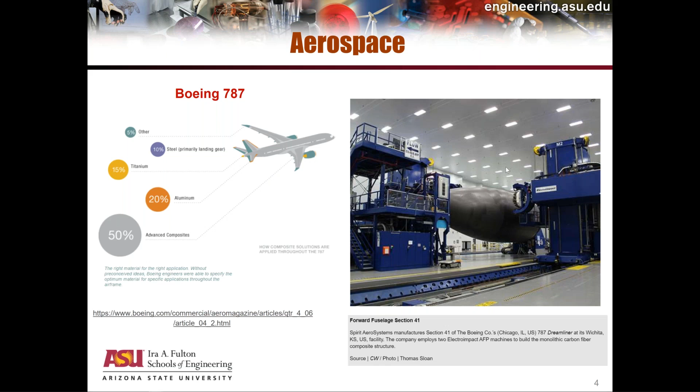So I'll put that on the side, and then I'm going to discuss a little bit about my history getting involved with research in the area of impact mitigation. Back in 2001, I was introduced by one of my former PhD students who was working for Honeywell Engines in the Phoenix area to the members of the FAA team that was taking care of the engine containment issue.

For those of you who are old enough to know, back in 1989, there was a United Airlines flight going to San Francisco. There was a fan blade out event that took place at 37,000 feet. Fortunately, we had the pilot able to control the aircraft reasonably well so that there was a landing that took place in Sioux City Airport. Unfortunately, 111 people out of the 296 died.

Since then, FAA has required all engine manufacturers to make sure that if there is an unexpected fan blade out event, the pieces are contained within the containment system and they don't sever the other systems in the aircraft, like the hydraulic and the electrical networks that are required for other performances.

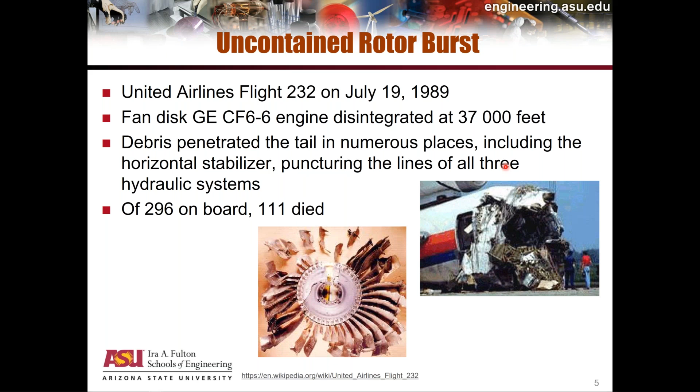Big engine aircraft manufacturers like General Electric, Rolls-Royce, Honeywell engines, and Pratt & Whitney have made sure that the latest generation of aircraft engines are equipped with the appropriate containment system, and they have helped a lot. If you look at the recent fan blade or disc failures that have taken place in the last 5-6 years, you'll find there are a few of them, and I've listed a few on the screen, and you can see images of some of the aircraft after they have landed on the ground.

So we have gone a long way from losing control of an aircraft in highly unpredictable ways because there was no containment system to take care of an unexpected event like this, to having more control over unexpected events like fan blade and disc failures and being able to maneuver the aircraft back on the ground.

So I got started doing research work in this area with sponsorship from FAA. They gave us money to start building a constitutive model that would go into a finite element program, and we started working on a finite element program called LS-DYNA, which is a commercial program started by John Hallquist after he left the Lawrence Livermore lab.

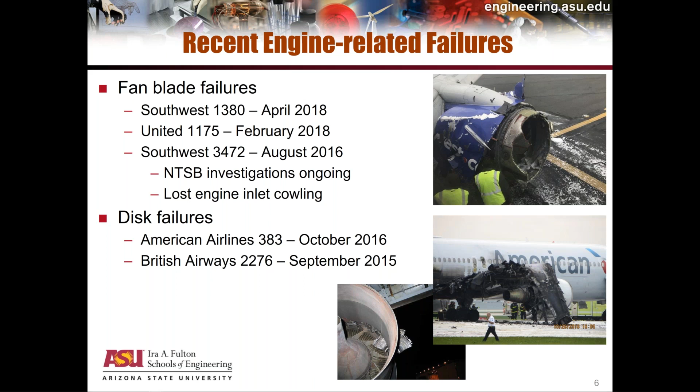So with that background that I started working on back in 2001, I started looking at other areas. By training, I'm a civil engineer, so my undergraduate degree is in civil engineering. My master's and PhD degrees are in materials engineering tied to solid mechanics. So I started looking for other areas where I could use this knowledge and come up with new product designs.

So if you want to do ballistic mitigation, there will be competing things that come into play. You want your product to be as light as possible. You want your product to be as thin as possible. You want it to be really cheap. And in the case of body armor, not only do you want it to be as concealable as possible, but you also would like to have the user have that wear comfort, so that when a police officer is wearing the body armor, he or she can fulfill their obligations without being borne down, without being weighted down by the body armor.

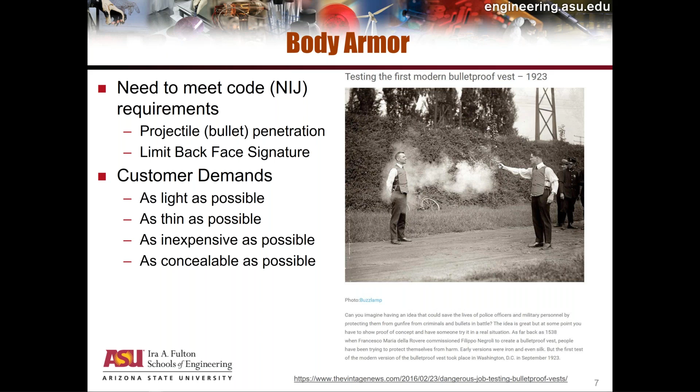So weight, whether you're designing aircrafts or helicopters, or you're designing body armor, or you're designing football helmets, is the one item on top of the list. To give you an idea, when you look at the armor that a typical US soldier wears, the total weight of all the stuff that the soldier has to wear is roughly between 100 and 150 pounds. And the two biggest culprits that add to the weight are batteries, because a lot of electronic gear is currently being used by the soldiers.

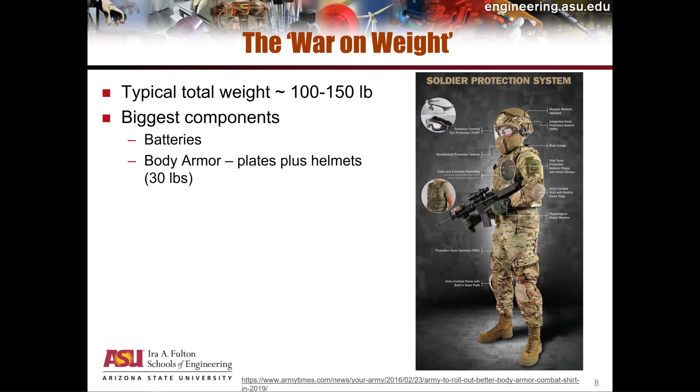And the second one is body armor. Typically, the plates and the helmets weigh about 30 pounds. So if you can shave 2, 3, 4 pounds, that is an enormous savings in the weight in terms of what the soldier would have to carry going long distances. And that savings in weight may translate into other functionalities that typically is not available because of the weight the soldier has to carry on the field.

So this is a very nice segue into how this idea also applies in the case of sports equipment. And I'm going to use the example of American football to illustrate that the impact you see with fan blade out events or with body armor is also borne out in sports equipment.

People have been ignoring this for a very long time, but this problem cannot be ignored anymore. There's a lot of news showing how poorly ex-NFL players are doing, especially the ones subjected to a lot of MTBI or TBI. These are traumatic brain injuries that take place when football helmets impact each other and the head is subjected to uncontrollable forces.

So between 1869 and 1905, there were 18 deaths and 150 serious brain injuries. But lately, when you look at previous data, they didn't have CAT scan data available, but now CAT scan data is available, so you can clearly see the trauma these football players have gone through.

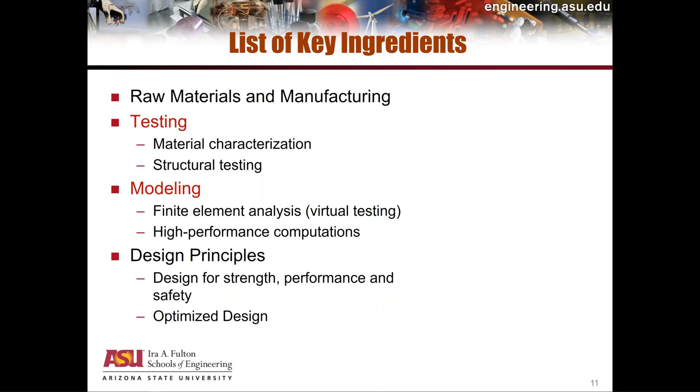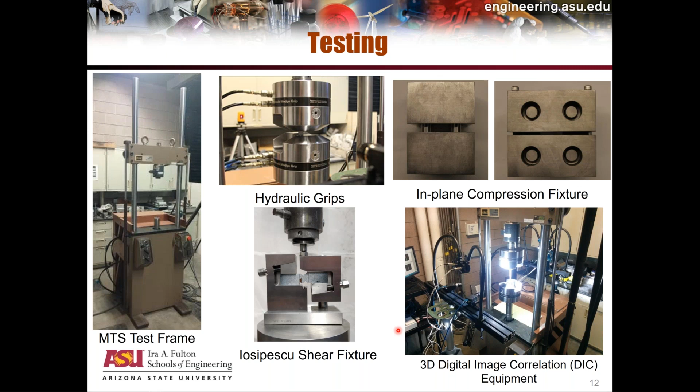In addition, we have high-speed cameras that we use to capture events where the duration could be just a few milliseconds. We have used this to test Kevlar, which I'm going to discuss a little bit as part of the engine containment system. So we take a piece of Kevlar, put it in a hydraulic system, pull it at a very high rate, use this camera, get the strain field, and then do the data analysis.

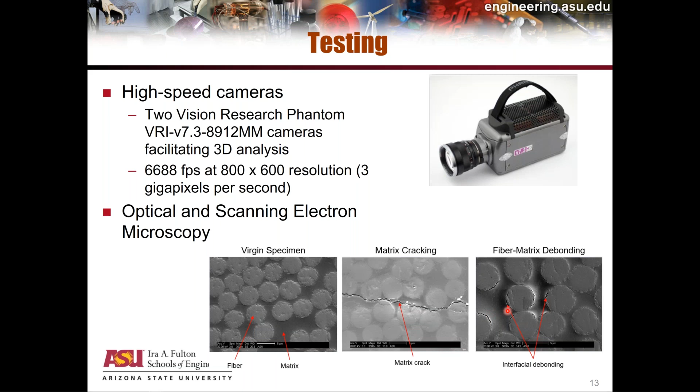And finally, we also have access to excellent optical and scanning electron microscopy that we use to find out exactly what's inside the material before it is tested, which I'm calling here the virgin specimen, and after it is tested, to show the different types of damage and failure that can take place inside the material. So here you can see matrix cracking, and here you can see debonding between the fiber and the matrix.

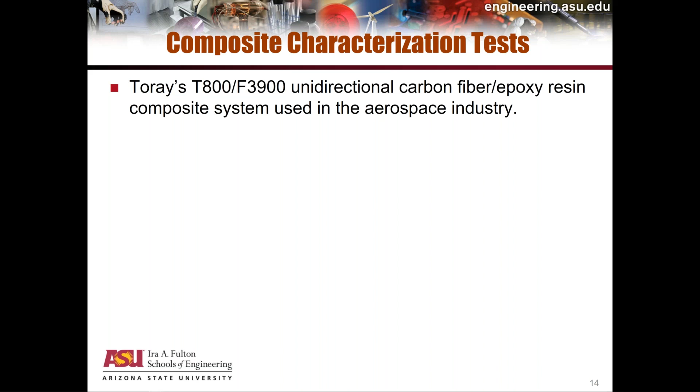So one material that we have analyzed and tested a lot, that is used quite ubiquitously in the aerospace industry, is a unidirectional composite manufactured by Toray Composites called T800/F3900. This is a composite which has a carbon fiber and a proprietary epoxy system.

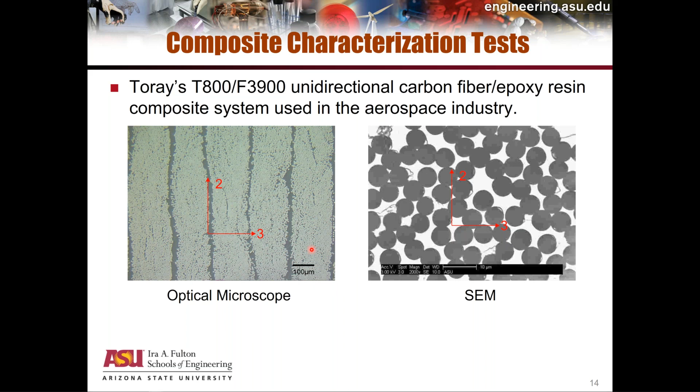You can see here we make a lot of assumptions when we do the analysis, when we build the model, but in reality these assumptions are not actually borne out when we examine these materials very closely in high magnified zones. So these are the material properties that we have found. Some of them are from the manufacturer, others are from testing in the laboratory.

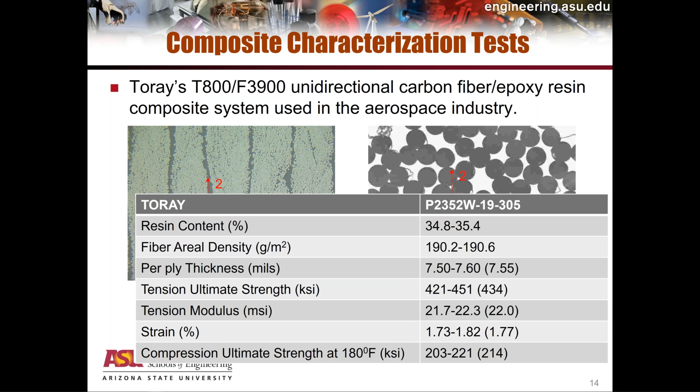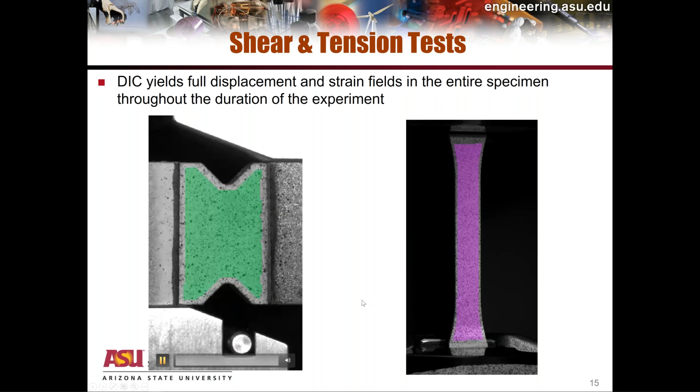I'm going to quickly walk through and show you some of the testing that we do to get material properties. On the left is the Iosipescu shear test being done, and on the right is a tensile test being done in the direction where the fibers are. All the colors you see are different strains being measured by the DIC software.

On the left, the shear test is stopped when we run out of room in the test equipment to carry the test further. On the right, we get a very nice crack in the gauge section in the center of the specimen. So we have reasonably good, reliable data available to us to build our constitutive models.

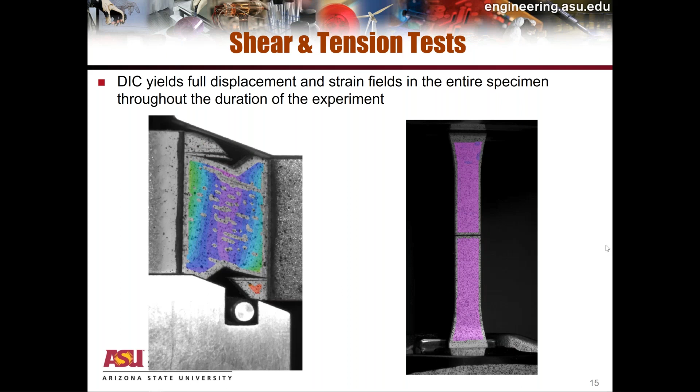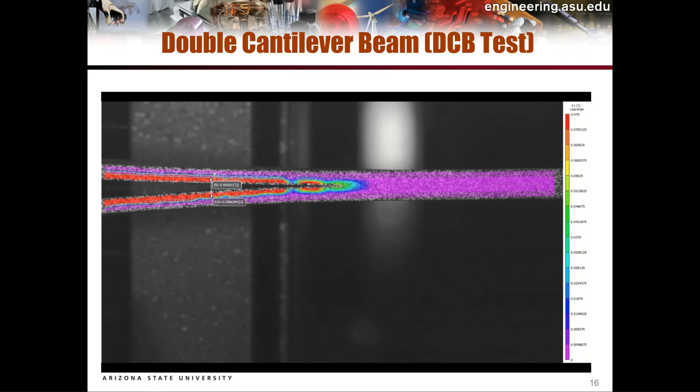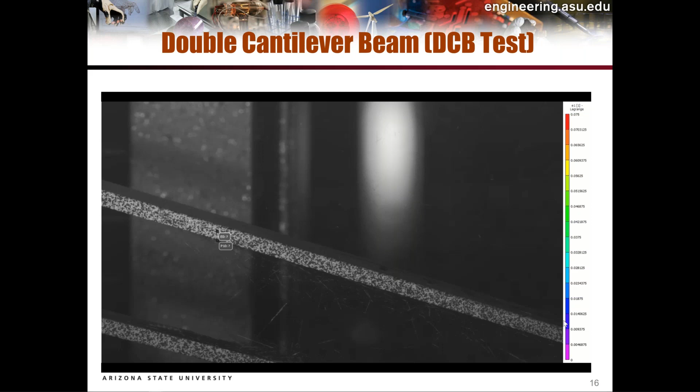So this is another example of how you would characterize a laminated composite. This is a double cantilever test being done to find out what the properties are between two layers of the composite, the two lamina, so to speak. Then the test results, the DCB and the end notch flexure test results, give us additional pieces of information to put into our computer model.

Now, these computer models, fortunately or unfortunately, are extremely expensive to run, so we have a high performance computing center where we run our computer models. There are 4 case studies. I'll quickly go through the first one, which deals with the engine containment system.

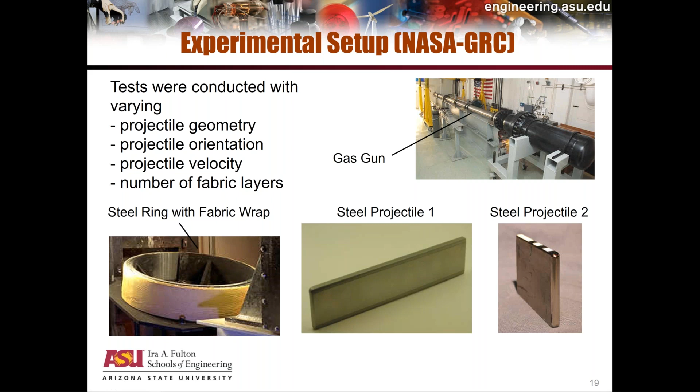Most of the testing, high velocity impact testing, was done at NASA Glenn Research Center. You can see the gas gun on the top right. We have a 40-inch diameter steel ring wrapped with layers and layers of Kevlar. There is a cutout here where these 2 projectiles are going to hit, against the Kevlar layers. The objective of this exercise is to see how good the computer model is in predicting this impact event.

So this is the computer model here. We have the steel ring shown in gray, and the Kevlar shown in gold. The LS-DYNA material model that we developed for this, for dry fabrics, is called MAT 214. These are the 2 models of the projectiles that I showed you in the previous slide. Then we take it and run it.

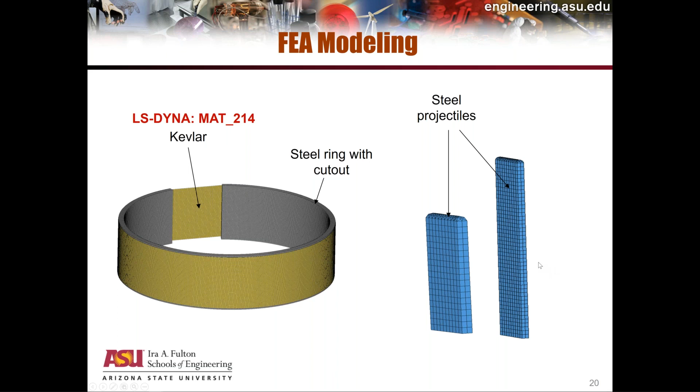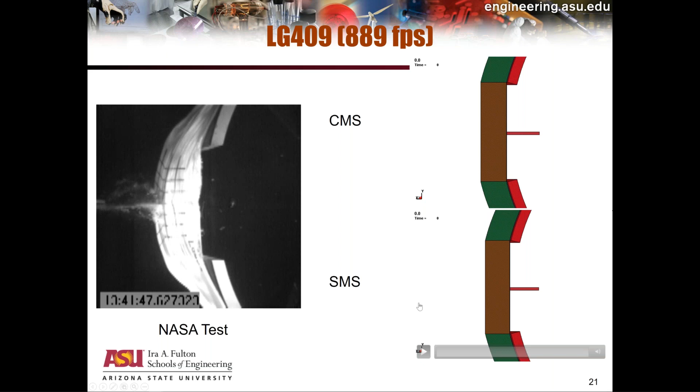On the left are high-speed camera images from NASA Glenn Research Center that show that with this configuration, the projectile is uncontained. On the right are our computer predictions. There are 2 computer models here, and both do a reasonably good job predicting exactly what the exit velocity of the projectile is, which is the gold standard in measuring how good the computer model is. You can see here the projectile velocity is roughly 889 feet per second.

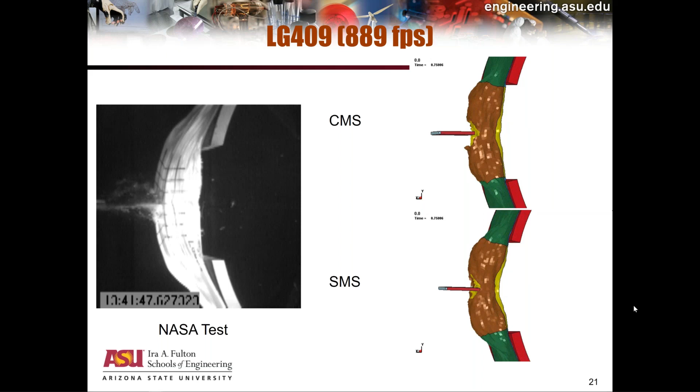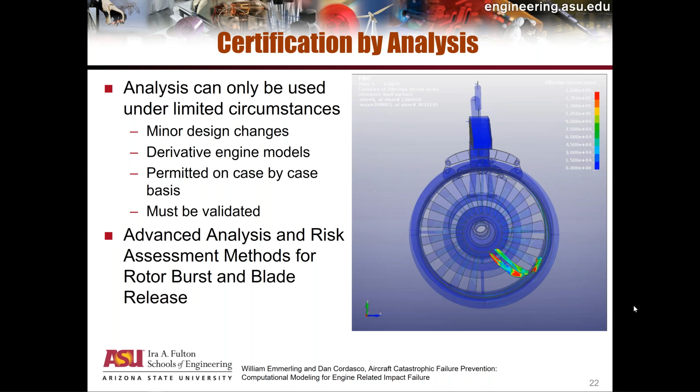Now, the reason I had the title in terms of saying design by analysis is because FAA allows certification by analysis, provided you can show that your analysis models have reasonably good predictive levels, so you can cut down on the testing. Anecdotally, I've been told by people at Honeywell Engines that doing full-scale testing of one of their engines runs anywhere between $5 million to $10 million, and they would obviously like to minimize the number of full-scale tests that they do.

Obviously, if you have a good predictive computer model, the cost is extremely minor compared to carrying out full-scale testing. So the second test case I'm going to look at is a much more involved project.

We have been working on this since 2013. This is what I'd like to refer to as the mother of all composite models for impact analysis. This material model, implemented in LS-DYNA, has been developed with funding from FAA and NASA as part of the Advanced Composites project.

It started in 2013 with funding from NASA. From 2015 to 2018, we received funding with FAA, plus additional money from NASA. Since 2018, FAA has continued to work with us and provided funding.

The other entities involved were George Mason University and Ohio State University. Ohio State University has excellent testing facilities to do rate-dependent testing, and George Mason University collaborated with us to implement the theory behind MAT 213 in the LS-DYNA program.

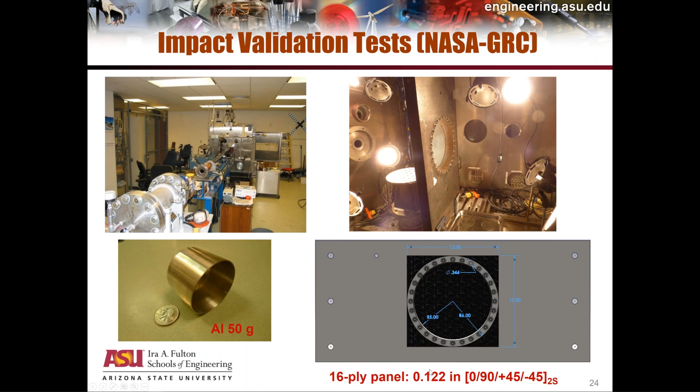That is then used by the high-speed cameras. Information is gathered, and then DIC is used to find the full field displacement, which is used to construct the strain field. They did a total of 14 tests, out of which 11 were contained and 3 were uncontained.

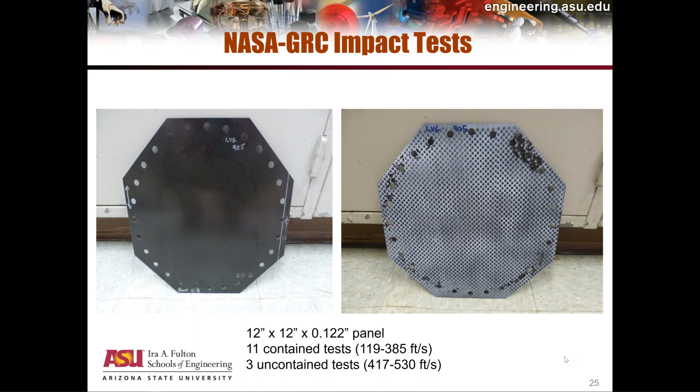I'm going to show you an example of two contained tests—one where the damage is not visible to the naked eye, and the other where the damage is visible—and show you how MAT213, or the LS-DYNA program, has been used as a predictive tool.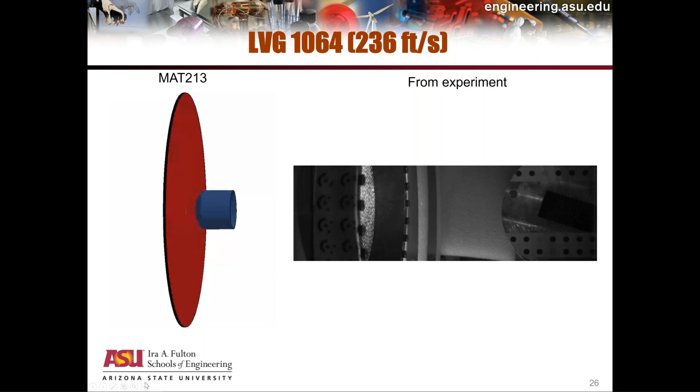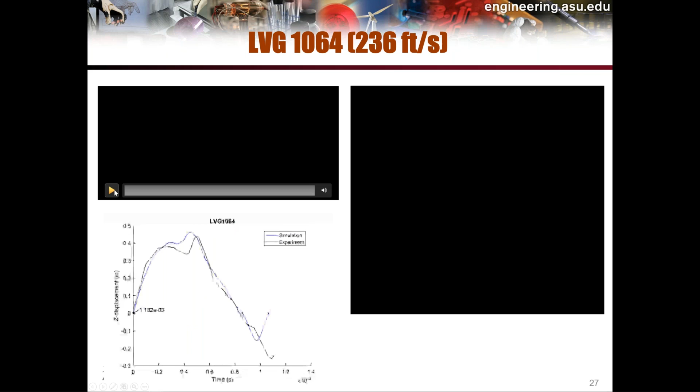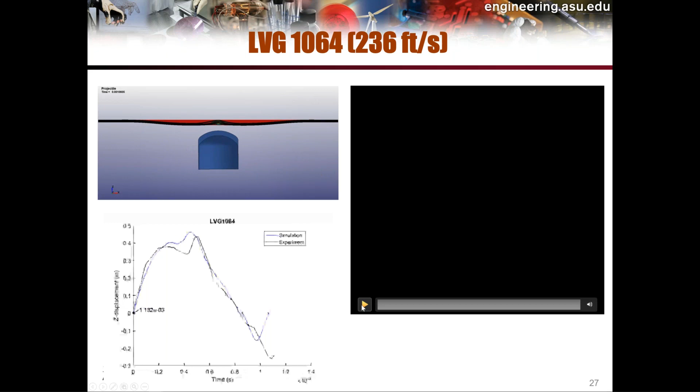We have the same thing available in terms of the computer simulation. Here I'm showing different snapshots—this is the projectile hitting the plate, looking bottom up. On the right is the rear side of the panel where we can see the Z displacement. Here we are comparing the computer prediction against the experimental data.

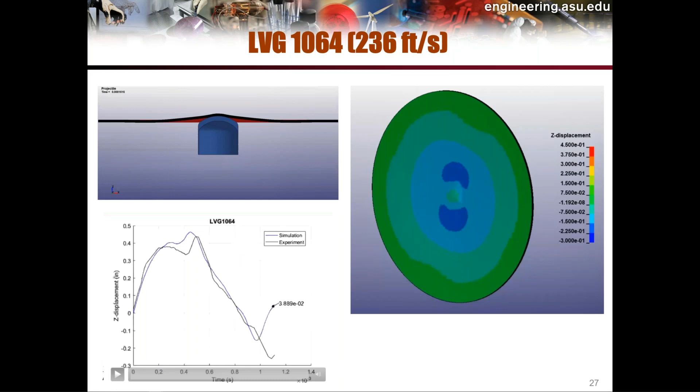The peak prediction and the time where it occurs are reasonably close to each other. We have pictures showing the percentage principal strain on the plate from the computer program versus what the DIC data tells us.

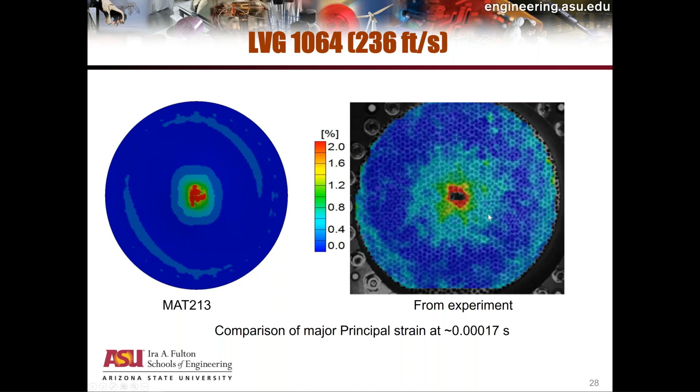You can see a little bit of damage here, but otherwise most of the plate is intact. After the testing was done, NASA took apart this plate and did ultrasonic scan images to come up with a diagram showing where delamination occurred in those 15 layers between the 16 plies.

These are the predictions coming from the computer program. When you look at the full simulation model, this is the area where we see delamination in the model. This compares reasonably well with what we see in the ultrasonic scan.

The ultrasonic scan will not tell us where the actual delamination is, but we can get that information from the computer model. For example, layer 4 shows this is the region with delamination, layer 5, layer 7, layer 9, and so on—so we have more fidelity available in the computer model that's not available in the experimental result.

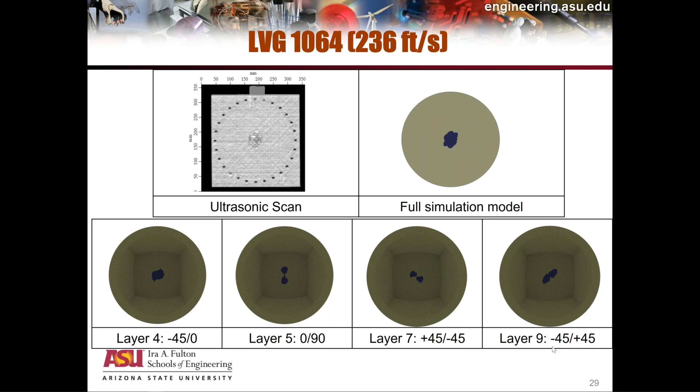This is an impact at a much higher test level where there's considerable damage, but the projectile is still contained. And here are the computer predictions.

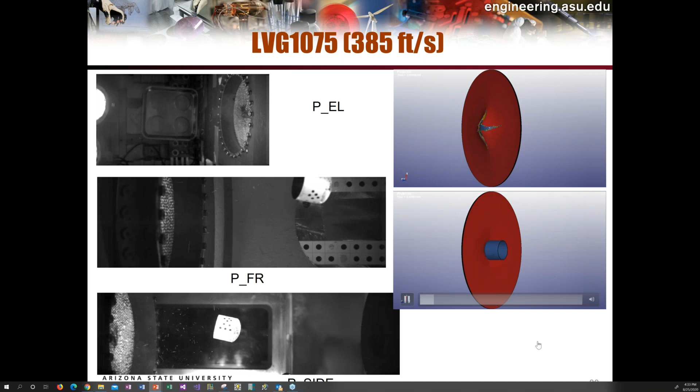This is the rear view. This is the front view. This is where the impact takes place. This is where you can see the backside of the panel, the cracks that have taken place.

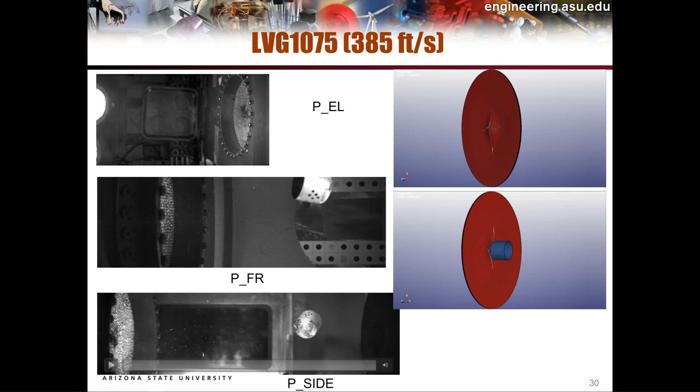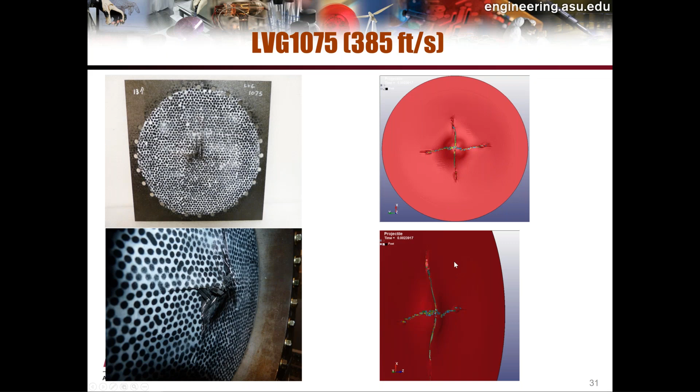Now we can compare these against the photographs available after the impact. So this is the plate after impact, a close-up of the damage around the point of impact. These two show the computer predictions, reasonably close in terms of what we were able to obtain.

So for my last two examples, I'm assuming I have about 5 or 8 minutes left. I want to spend a little time looking at something that may be of interest to all of us, since we can understand these things slightly better. There are interesting stories behind these two examples I'm going to discuss.

The first one I'm going to discuss is the design of a personal armor protection system. For about 10 years, I worked for a company called Armor Designs in the Phoenix area. That company was set up to develop body armor for law enforcement and also for the US Department of Defense.

The example I'm showing on screen is an NIJ level 3 body armor plate. The competing factors here are weight, cost, thinness, and comfort to wear. This goes back to the 2010-2011 timeframe, where we came up with the lightest NIJ level 3 plate, weighing roughly 3.2 pounds.

This plate was able to easily defeat 6 shots of M80 rounds fired at roughly 2,780 feet per second. The computer model we used was only for 1 shot, and we were reasonably sure that if it could defeat that shot, the actual produced armor would handle all 6 shots, and that was indeed the case.

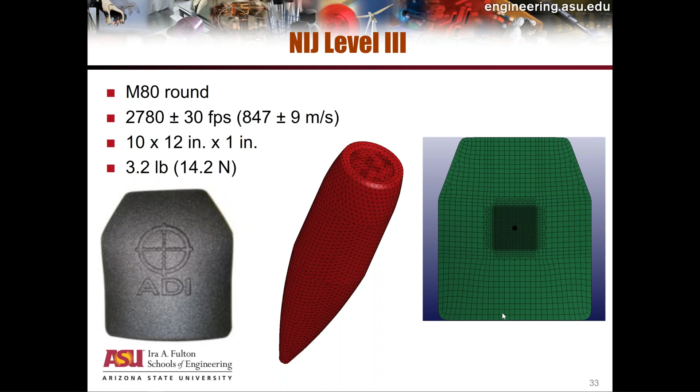Here is the LS-Dyna model, a cross-sectional view through the armor plate. There are many more nodes and finite elements in the region of interest, and fewer away from it. You can see the bullet starts off undamaged, and at the end, the bullet is completely captured in the body armor.

This is an actual armor that was shot, where the bullet is completely gone, except for a little piece you can see here. We got this cross section by using a water jet to cut the plate after it was shot at one of the certified testing facilities.

So this is the comparison between the finite element prediction and the actual ballistic test. A fair amount of work goes into building these finite element models. I don't want to give the impression that building computer models is extremely easy, with no issues — there are lots of issues you have to resolve.

Here we used coarse, medium, and fine finite element models. By putting in more finite elements, you get better fidelity, but at the cost of greater compute effort. In each case, we used 2 metrics to judge how good the prediction is. The first is called back face signature.

The NIJ standard says if the back face signature is greater than 44 millimeters, the plate has failed the test. That means if a person wearing body armor has the bullet arrested within the armor, but the back face signature is 44 millimeters or more, it will leave a huge mark on the skin, and internal organs may be damaged. That's why you want to limit the back face signature to 44 millimeters. Why it's 44 is another webinar's topic, but that's the standard we follow.

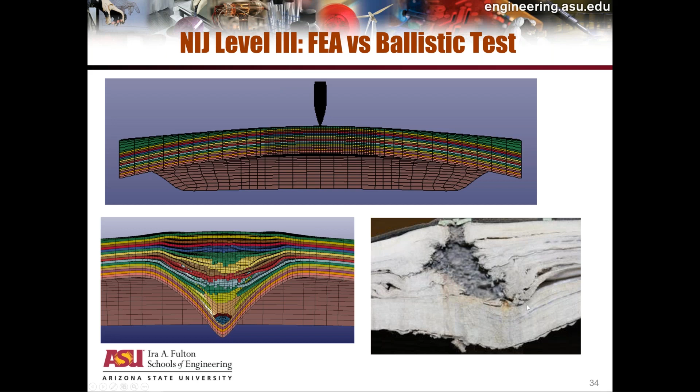Our prediction showed we could capture the bullet with a certain number of undamaged layers, giving a back face signature of roughly 36 millimeters across all 6 shots, while the ballistic test showed an actual back face signature of 40 millimeters. There were 35% undamaged layers in testing. If you look at the previous slide, these are the undamaged layers, and the computer model predicted 30% undamaged layers — again, reasonably close to the actual test results.

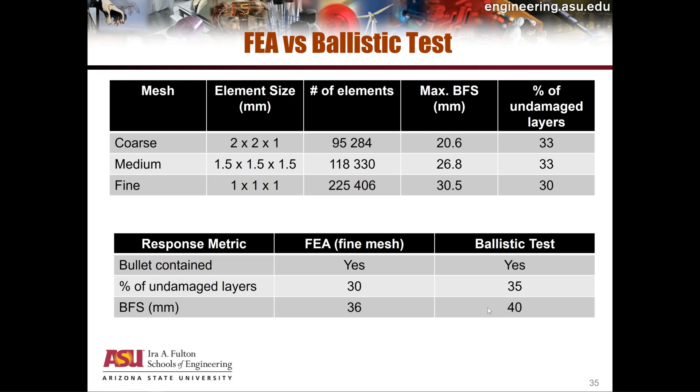So time for the last example. This one talks about football helmet impacts.

One of my master's students, who is now working for Honeywell Engines, took this on as a master's project. He used the same laboratory that we have. Some of the equipment in the lab was used to characterize the material inside a typical helmet, I believe this is the Riddell Revolution attack helmet. Unlike the other examples I've discussed, here the football helmet is repeatedly used without being completely damaged, which creates additional challenges for designing a helmet to minimize the effects of high acceleration during an impact event.

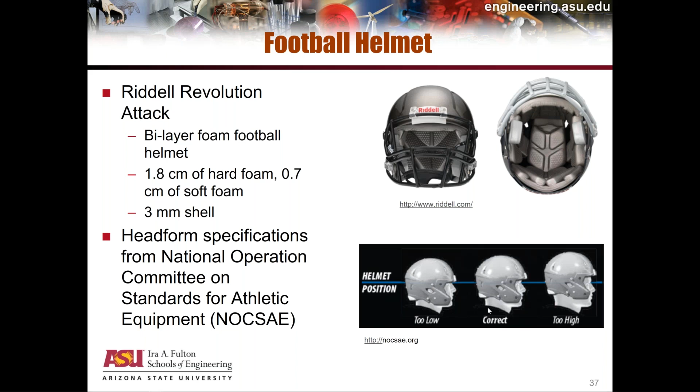There is an agency called NOCSAE that has standards for head forms, and they provide guidelines for checking whether the helmet is properly positioned on a player. So we built the computer model. We did not take two individuals or players hitting each other; instead we mimicked the hit using a solid impactor, which is a steel plate or steel block, or an aluminum block, whatever you want to use in your drop test.

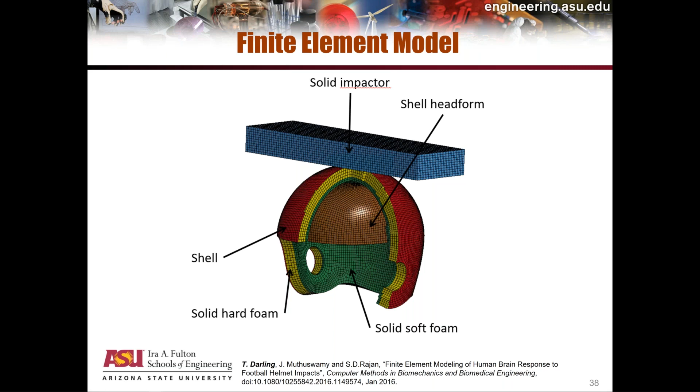This is the finite element model containing all the components: the shell, the solid hard foam, and the solid soft foam. If you're interested, this journal paper gives more details on how the model was built. We instrumented the model in the lab to check the predicted capabilities, and then used this model for the helmet in the actual impact testing.

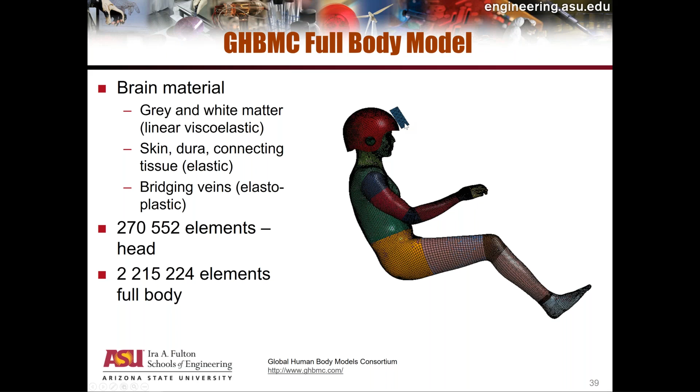So we took the body model, put on the helmet, added the impactor, and ran two simulations: one a crown impact simulation, the other a frontal oblique impact simulation. Then we looked at the strain levels. I was fortunate to work with a colleague who is a biomedical engineer and does this for a living—he understands exactly how to characterize what causes MTBI and how it relates to the strains and strain rates the human body actually experiences.

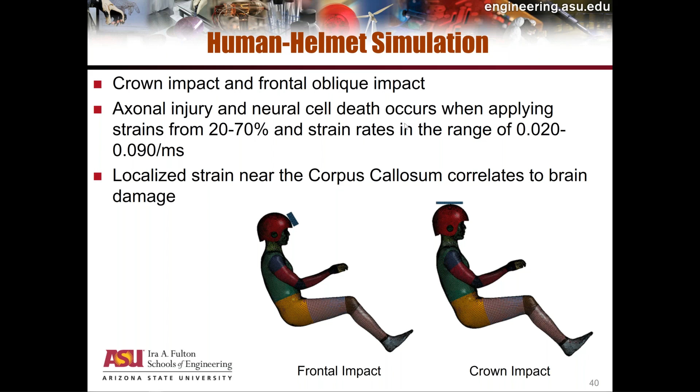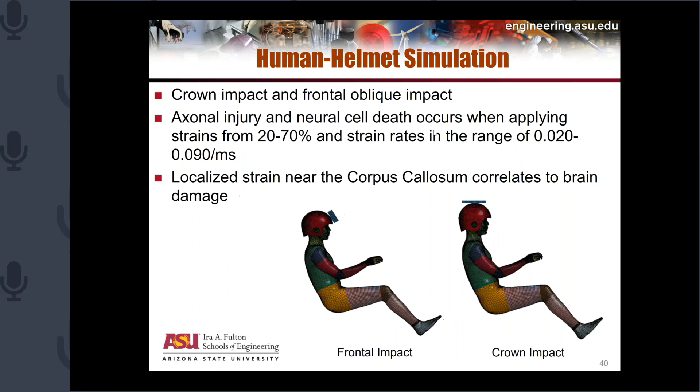Now we have a model that is extremely predictive. Getting actual data from a human being is impossible, obviously, for very obvious reasons. But how do we gain confidence in the computer model and use it as a predictive tool? We can go inside the model and find out exactly what the strains and strain rates are. The brain stem, the midbrain, the corpus callosum can all be queried within the computer model to see exactly what the values of strain and strain rate are.

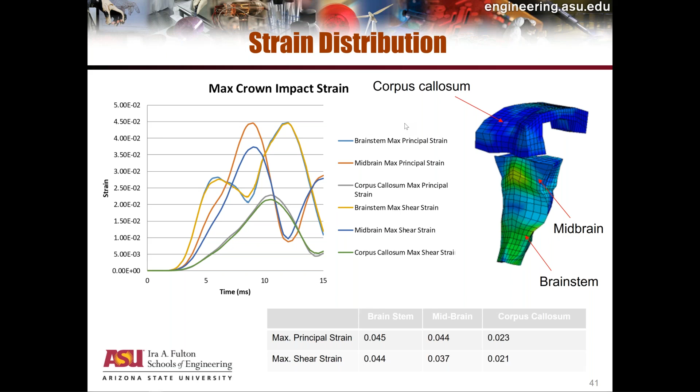They trained Dr. Dan Cordasco, an excellent individual who is now funding the research work and serves as technical manager. The other entity I want to acknowledge is the NASA Glenn Research people, especially Doctors Rob Goldberg and Mike Pereira. Mike Pereira has done all the impact testing at Glenn Research Center and has worked closely with us, sharing data and giving insights into how impact takes place and what needs to go into the computer models.

In terms of my personal body armor work, I want to thank Honeywell International, based out of Richmond, Virginia, and Dr. Ashok Bhatnagar, a technical fellow for Honeywell, who has funded some of my research and worked closely with me, especially on armor designs. And obviously, a multitude of my graduate students, colleagues, and collaborators at different universities. And with that, my presentation is over. Thank you very much.